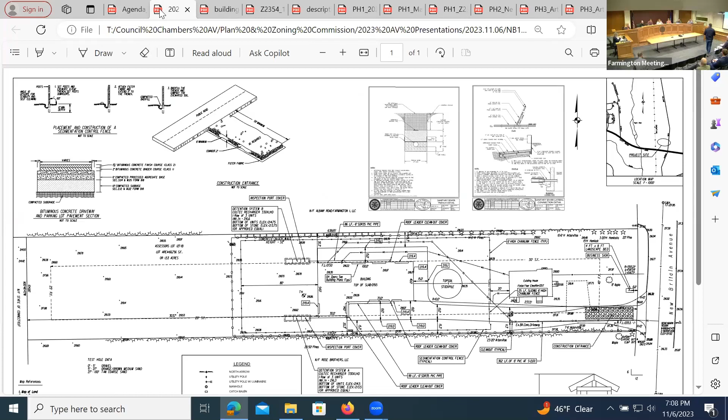All right, the first new business item in front of us is an application from B&R Corporation. It's for property located at 1722 New Britain Avenue, and it's an application for a site plan to install a steel storage building. And who do we have? We have the applicant and his engineer. Okay, thank you. If you can come up, introduce yourself and give us your address, please.

Hi there, my name is Jared Braddock. I'm here on behalf of the applicant, B&R Corporation, from 216 Bogue Road in Harwinton, Connecticut. Do you need my personal address as well?

I'm here tonight to talk about 1722 New Britain Avenue in Farmington. The plan's up on the screen. Currently it's a 1.53 acre lot with an existing 1,200 square foot plus or minus building, used as office space under previous approvals. The lot is located in a C1 zone with approximately 105 feet of frontage on New Britain Avenue, so it's an existing lot but nonconforming to C1 frontage requirements.

The existing building is serviced by public water. Upon purchasing the building in the spring of this year, we discovered the septic system required repair. We got a permit from the town and instead made a connection to the sewer lateral on the property, so the existing building is now connected to the sewer. The health department has been notified and is aware, so that work is complete. There are no wetlands on the property and none of the work is done in the wetlands or upland review area.

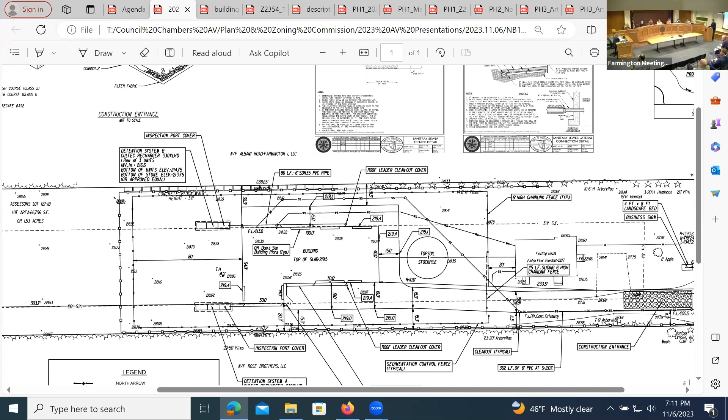The additional space on the side for the side yard would really help with the use of the building, and that 40 feet of width is important for us to fit what we want inside the building.

We received some notes last week from Shannon and her department. After reviewing them, we didn't find anything objectionable—everything the town suggested was reasonable and things that should be added to the plan. We appreciate the helpful suggestions. We submitted a revised plan this afternoon, which addresses many of the items Shannon's team pointed out. Anything not yet on the plan is simply because we're a bit short on time, not because we're disputing it—we just need a little additional time to add those items.

In brief, there were a couple things that came up, and we can go into further detail. One item was what we're doing for parking for the office space.

There is an existing house in the front. As you can see, where you pull into the driveway, there is an existing turnaround that we're proposing to use as the parking area for the person working in the office. It already exists as non-permeable space.

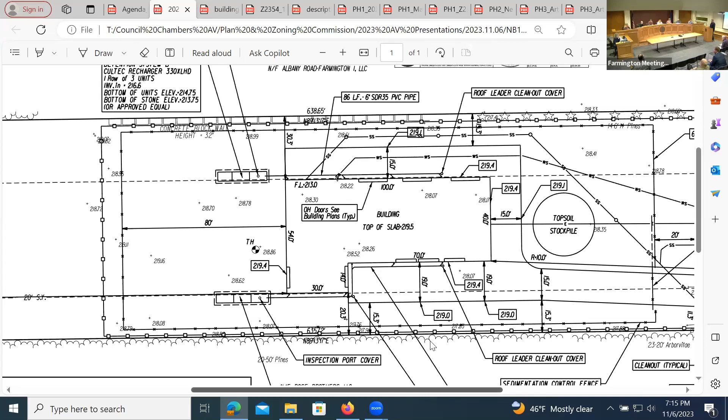There were also a couple questions as to what we submitted for the landscaping. The current plan tries to show everything currently growing on both our property and the neighbor's property. We did plant some additional pine trees on the northern side towards the front, shown as little stars on the plan. On the southern side we planted a hedge of arborvitae trees as well.

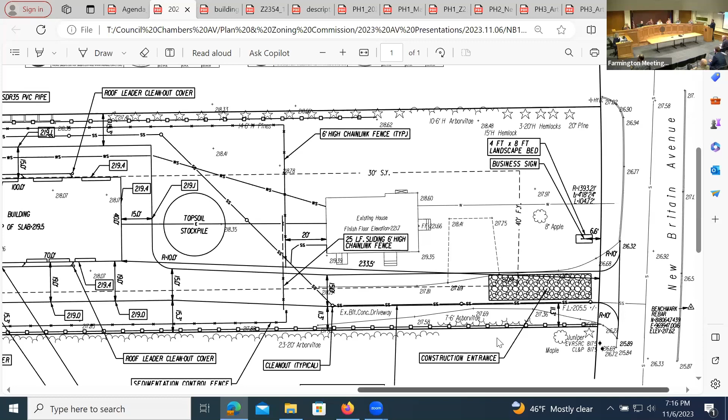When I originally read the zoning I misunderstood it required 2 trees per 50 feet. I did the math and we planted enough trees to make the 2 trees per 50 feet, but they aren't spaced at 50 foot intervals, they're all kind of together. So every 50 feet, if we need to add 2 additional trees, we'll do that to make sure we're in compliance with the zoning. That's something that was brought up and a change we can make.

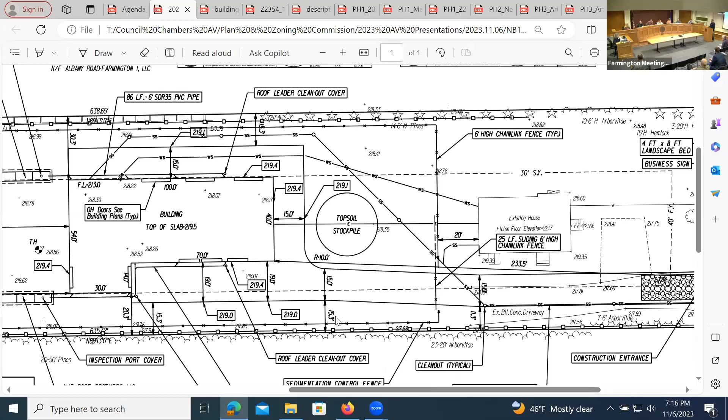That's sort of the overview. I'll take any questions you have. Brian's here with me from Robert Green Associates. Any specific details about the subsurface drainage for the roof collection, and what we've done to improve things, we have less non-permeable surface than what's already existing on the lot, he can talk to that as well.

Ideally what we're asking for tonight would be a conditional approval, if there's enough information here for you to do that, contingent on us providing the additional drawings requested by engineering and by the town, so they feel comfortable, and you feel comfortable, that we're building to zoning compliance. I think that's everything.

Brian, did you have anything you want to say before I... unless they've got comments. Okay, so if there's any questions we'll start there and go from there. Thank you. Thanks for coming in.

Shannon, can you put this on GIS for us? Of course. Yeah, you'll have to give me a minute, I didn't get a chance to open it for the meeting.

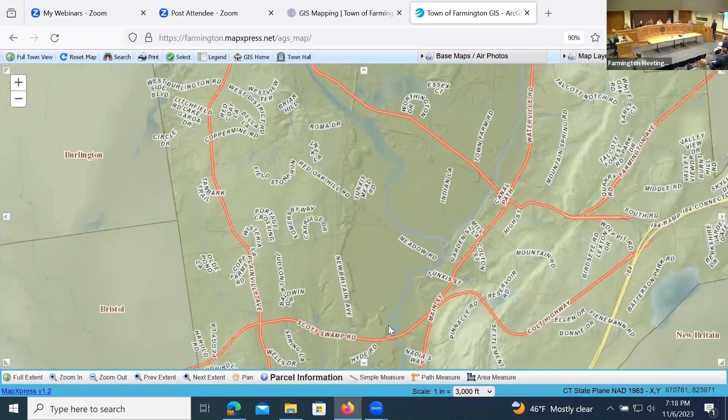All right, so it's a resident, a single family home in the front, and then this proposed pre-engineered building would go in the back. I think you told us, Shannon, that the use of office was already granted. Correct, so it has the appearance of a single family home, but it's been used in a somewhat hybrid manner over the last few years, as an office/residence. It is in the C1 zone.

So this is the property, 1722 New Britain Avenue. I'll put the aerial on. Thank you.

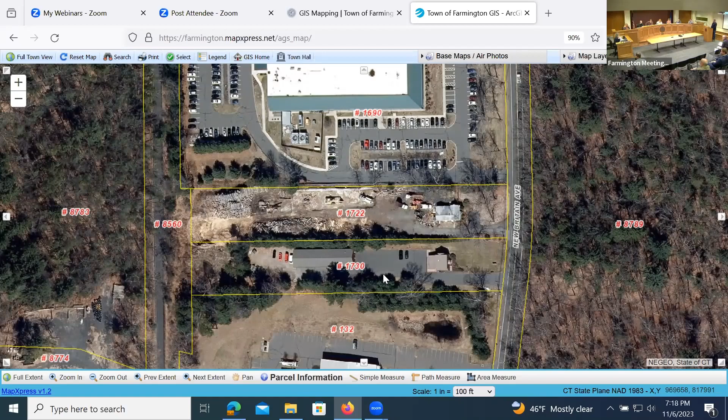And the aerial dates to 2019. So it's right next to that office park. Correct, it's immediately south. And then this, although relatively a single family home, the property to the south, 1730, is a contractor. I believe Rose Brothers is there. And then McPhee, yep, on the corner. Phoenix.

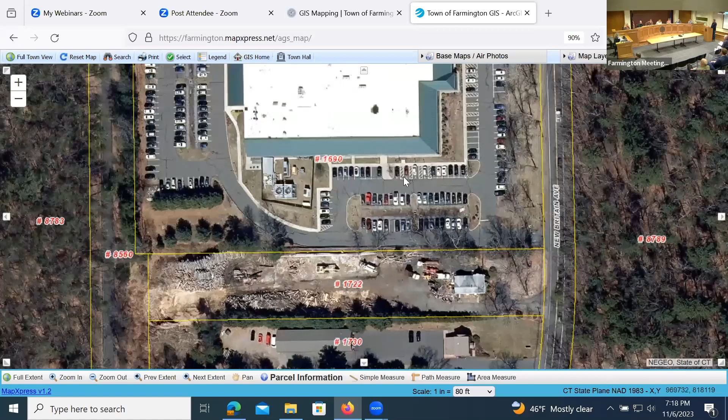Alright, let's turn it over to the commissioners. Mike, questions? How many vehicles will be stored in the prefab building?

Approximately 14 to 20 vehicles. How many of those are personal vehicles? All of them, they're all personal. So no business vehicles are gonna be parked there, they're privately owned vehicles. In addition to that, he does have a John Deere tractor that will be parked there.

He owns it, needs a place to park it. He also has a residence in Farmington, so it's inappropriate to park at the house. He also has a couple implements that will also be inside for that tractor, like a brush hog and some things like that.

You can come back, Mike. Okay, sounds good. Patrick, just to touch on what he said, you had mentioned equipment, I'm assuming that's what you mean, right? When you said cars and equipment stored inside. Yeah, so just in the interest of full disclosure, he has a John Deere tractor that he's gonna store inside there, yes, and the brush hog. Yeah, correct, and the implements for it. Yeah, that's it.

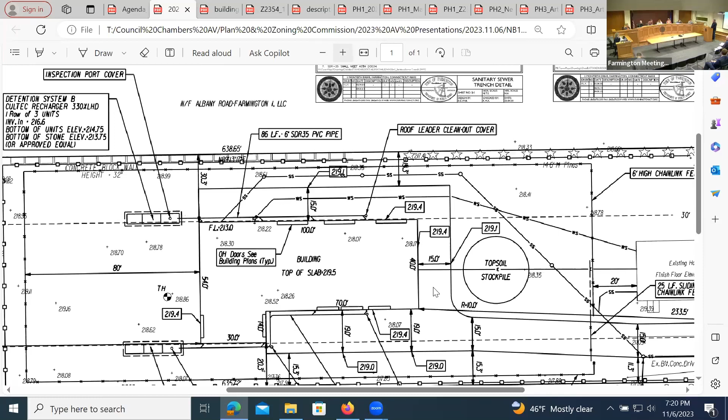Okay, Liz? You talked about having door access on both sides. Does that mean there's gonna be pavement encircling this, or what's the driveway? I'm not quite sure from the plan.

So we're showing a proposed driveway on 3 sides of the building. There is one additional garage door on the south side, back of the building, where that little L section is. We're not proposing to have any non-permeable surface there. That'd be a place where we need to mow the backyard, we could drive the mower out and have a place to park it afterwards. So the vehicles are gonna be parked along the south side, the garage doors on the south side and north side of the building.

And then there is a corner in the back there, would I guess would be the northwest corner. In that area of the building, we're gonna have a handicap accessible bathroom for the owner and a mechanical room for the heating system. And then we're gonna have a little kitchenette there where they can have a refrigerator and the sink to keep some lunch and things like that in. So like a break room, I'd call it.

I think I'm good for now. Okay, something else might come up, thank you. No problem. Matthew?

So you mentioned, or better yet, the plans show a topsoil stockpile. Is that gonna be the only location, or are you going to have more locations for the mulch and topsoil?

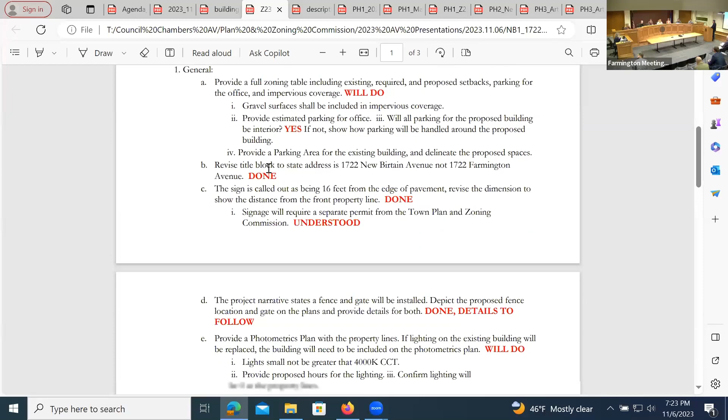So the comments include all of staff comments, engineering and planning. The responses just came back in, like I said, around 4:30-ish today. I have not had an opportunity to read through all of them.

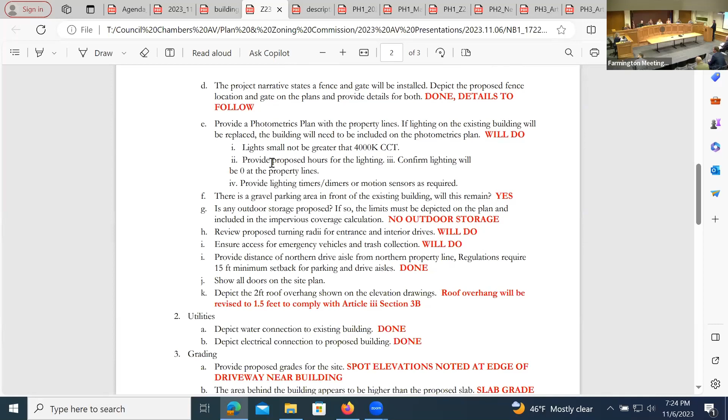Perhaps some of the more critical ones that we would have had would have been related to the drainage. Perhaps Brian can speak to those if you want. We can get to that. That's fine, okay, I'll move aside.

Good evening, Commissioners. My name is Brian Cunningham. I'm here tonight representing Robert Green Associates, engineers and surveyors out of Terryville, Connecticut.

Regarding the drainage related comments that had come in, there were some questioning the capacity of the underground storage system. I did a quick review of that and found that the initial calculation didn't account for the edge of the roof over the side of the building.

So it added an extra - in the original proposal it was 2 feet, but because that would make a zoning problem, I spoke to Jared this afternoon and said you can have 1.5 feet overhang and still be in compliance with zoning for the side yard setbacks on the building.

So in doing that, I reassessed the size of the underground systems. The system on the north side of the building had to be expanded from a 2-chamber system - these are underground plastic chambers - to a 3-chamber system. The size of the system on the south side of the building was unchanged. It was a little bit over-designed the way I was rounding numbers and all that.

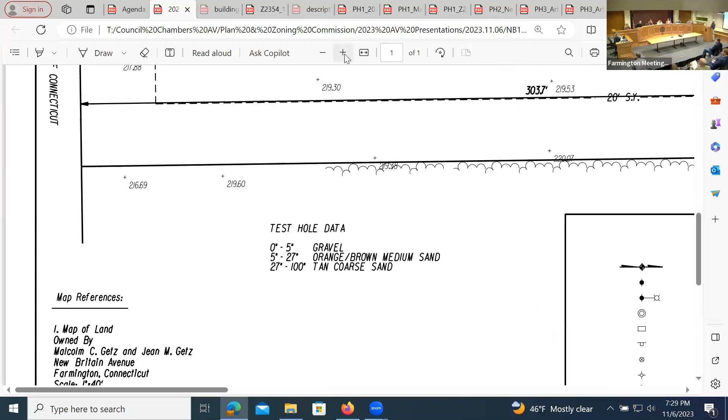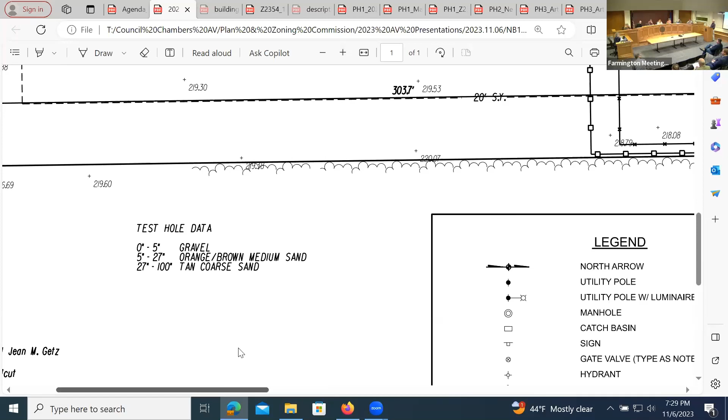We went down 100 inches. Okay, and that was done mid-October? Yes. No groundwater? No, no signs of any groundwater in the past. Mottling? There's nothing. It's all good.

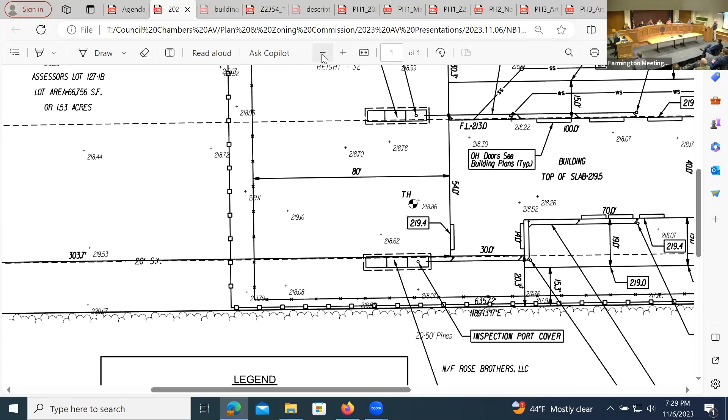You're all set, Shannon? I am with that. I've got one other related to landscaping, but I'm all set with the stormwater. I'm just thinking, do we need time to review the responses? If they just came in this afternoon, maybe we wait and vote on this on December 11th. I don't know how the commissioner feels. Well, it's the commission's choice. So, staff...

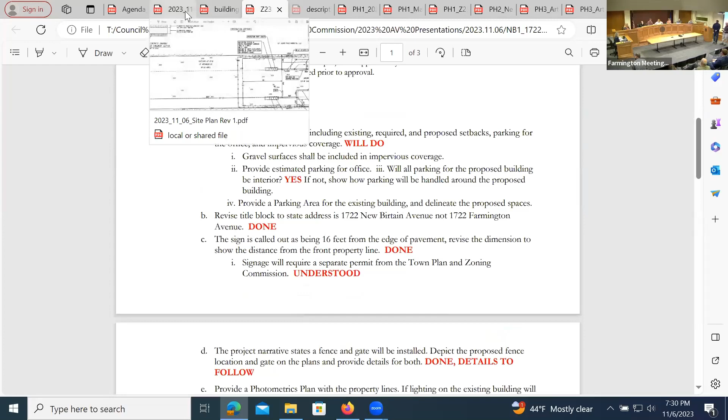Mr. Burdock, you indicated that you're agreeable to all the comments. Yeah, absolutely. Do you need to come back up? Yes, please, since it's being recorded. Thank you. There was nothing on there that was unreasonable in any way. The only thing I think I really need a point of clarification on, so we're on the same page, is exactly what you guys would like us to provide for the landscaping, which we'll do, so we're in compliance for that. But otherwise, there was nothing on there that caught my eye as unreasonable.

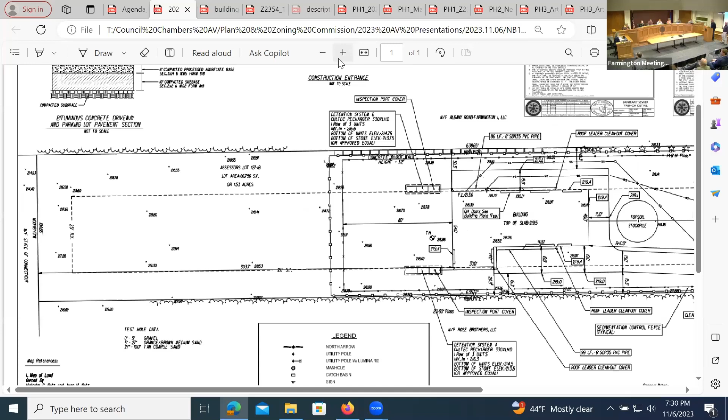It would be a 15-foot width, but really the 15-foot width is limited to where the two driveways are. So it could be the 20-foot width for the landscaping in this area, but again, it's one tree per every 50 feet. Right, the rest would be lawn.

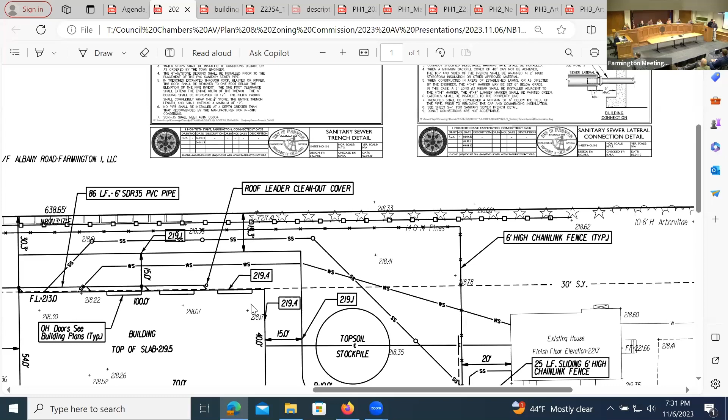The 15-foot width, I can't read this, Brian. What's the... is it 15.3? I can't read it, there's a number on top of a number, and letters. Yeah, okay, it's 15.3 feet from the north property line to the pavement, and 15.3 on the south. Correct.

And then this area to the west, grass - this is all gonna be revegetated and lawn. That's correct.

If they're agreeable to address the comments as presented, and the commission is satisfied with having them as a condition of approval, then I don't see any need for anything further. Obviously, if any of you have further questions. Mike, would you feel comfortable with those conditions?

Yeah, I do have some questions. Go ahead. Maybe just help explain this to me. So it's personal vehicle storage for up to 20 vehicles. Correct, the house is going to be office space with one full-time employee, correct. Why is there a break room in the prefab building?

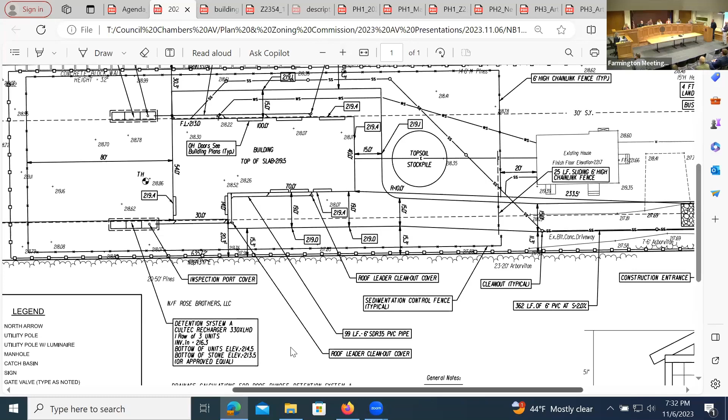Who's the break room for? The owner. I don't know what else to call it, there's gonna be a kitchenette in there, so, you know, the building's 100 feet long. He's in there with his cars or doing whatever he's using the building for. If he wants to have a sandwich or whatever, he's got a fridge to keep it in, a place to wash his hands, and that's really all it's gonna be.

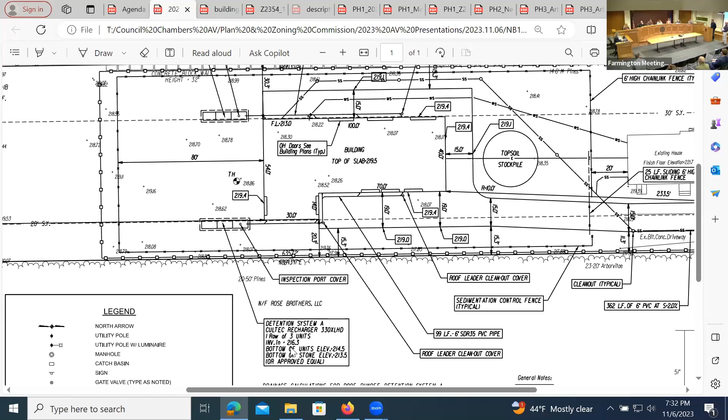And a bathroom. So is there going to be work being done on the vehicles in here? No, not outside, maybe adding air to the tires or something like that, but any work that needs to be done, people get hired for that and the vehicles go out and get serviced. Okay, I have no problem with this type of building in this area certainly, but I just wanted some clarification on what the use was. Yeah, and we're not gonna do any service to vehicles there. Only storage? Okay, you're good?

Yeah, I'm good. Are you comfortable if we condition it with engineering comments? Yeah, okay. How about this side? Any questions for the applicant? No, nothing further. What about impervious surfaces? Sounds like we're ready to vote, and everyone knows what we're voting on.

We need a motion and a second, please. I failed the first one. Yeah, you got the next one. I got the next one down. All right, so what's the condition? Condition, engineering, yeah, just to satisfy the engineering comments.

I'd like to make a motion to approve the application by B&R Corporation for site plan approval for 1722 New Britain Avenue to install a steel storage building, as presented, with engineering conditions. Shannon? Yes, fine. He's already consented to the engineering comment. All right, second. Second. All in favor? Aye. Opposed? Okay, it's unanimous, thank you. Thank you, appreciate your time.

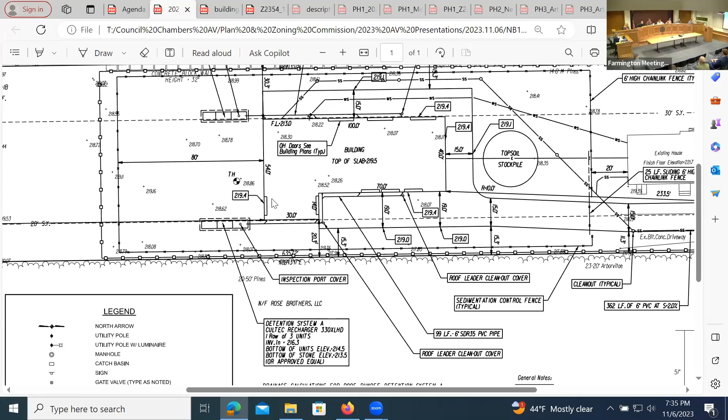Thank you. All right, everyone, we're moving on to the public hearing portion of our meeting. This is where the applicants have a chance to present their application. We, as commissioners, get to ask questions and then turn it over to you, both here and online. And we'll see how it all shakes out.

The first application is from Dunning Industries, Inc. It's an application for special permit and site plan approval for a nursery and garden center at 1079, 1085, 1091 Farmington Avenue, BR, R30, and FP zones. And who do we have? We have the applicant and their engineer. Multiple versions of the applicant.

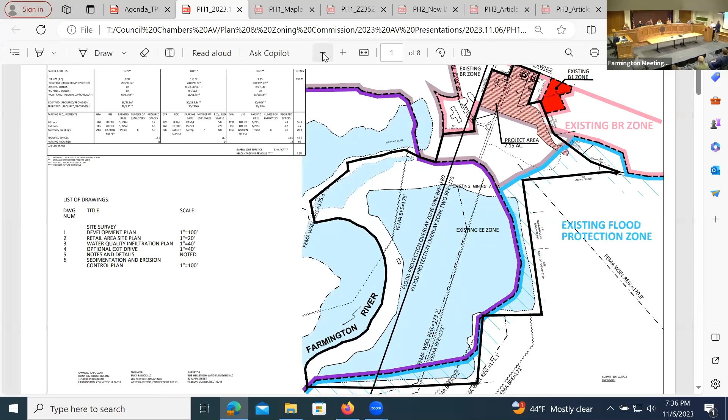Good evening, I'm Benjamin Dunning, President of Dunning Industries. This is Neil Lajeunesse, VP. Unfortunately, Bill, our engineer, was unable to be with us this evening, so we'll try to hopefully answer all the questions that you have. The application, what we're proposing to do is a retail nursery and garden center.

That's going to be catering to both retail and contractors. There are essentially three separate properties. We're going to join the three properties together into one entity, with different uses for each of the buildings. The 1079 Farmington Avenue will eventually, we believe, become a cafe for people, but that'll be a separate application.

Just speaking for the overall use of the plan, the middle building, 1085 Farmington Avenue's, primary use is going to be the retail garden center. And then 1091 Farmington Avenue is going to be our contractor offices for the contractors and wholesale nursery.

We are- I don't know if you want to pull up a little closer in on the plan. Into which part, the retail area or whatnot? 1085? Yes, 1085. Now for orientation, this was Green Tails Market, correct? Okay, thank you.

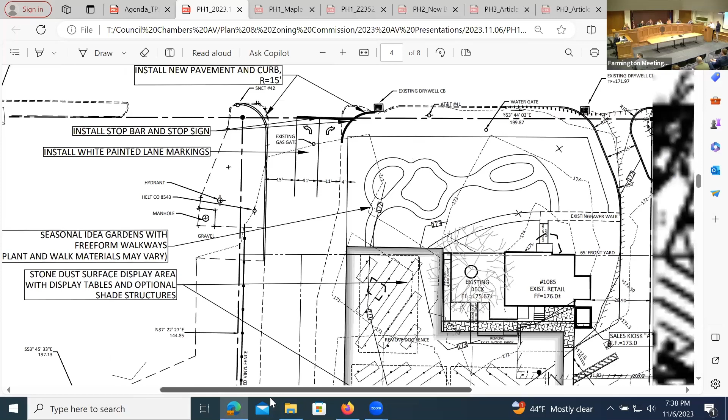So as you can see, we're proposing one entrance between the two buildings. Right now it's in and out between the two. We're proposing that to be one entrance going in with angular parking, and then exiting out between 1085 and 1097, so that the traffic flow goes in one direction. There will be contractors that come in on that same exit area, and deliveries coming in there too, but all the retail traffic will come between the two buildings.

There's going to be two primary areas for plant sales - well, actually three, but two primary ones - one directly behind the building of 1079 and the other one on the other side of the parking, to the south. That's all going to be basically a stone dust area with tables set up and irrigation for displaying and showing the plants.

There's going to be several kiosks or small outbuildings so we can ring customers up inside the building, but also have two essentially sheds with little registers in them so we can make it easier for people to bring their wagons over and ring out right there and then go straight to their cars. Inside the retail building will be smaller, pretty things, general garden accessories.

From there, we're going to have the contractor building, which will be at 1091, as an area for consulting and office space for employees. There'll be a break room over there, and then an area for loading contractor vehicles such as trucks with trailers, taking larger plant stock or trees that need to be loaded and sent out. As far as the initial use for 1079, it will be for storage and office use for now.

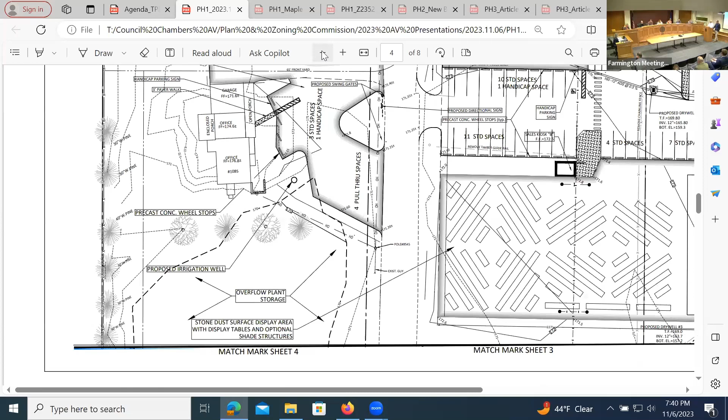We were given some comments from planning and zoning, one of which was to address adding some signage about the one-way going in to make it clear that that's only an access, and we're happy to oblige - that's not an issue for us - and clearly delineating that everybody needs to go out between 1085 and 1097. We proposed a hoop house structure, which is a seasonal structure only to be used during the growing season to house greenhouse plants.

Any of the fertilizers or things of that nature will be kept on 1091's property, which is outside the 100-year flood zone, per regulations, and will be kept locked and separated away from other products.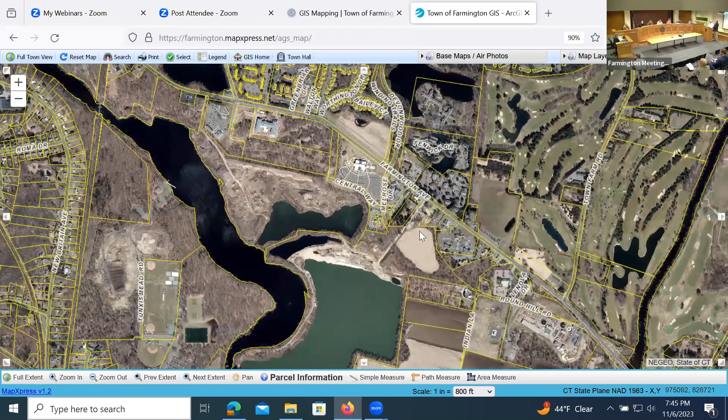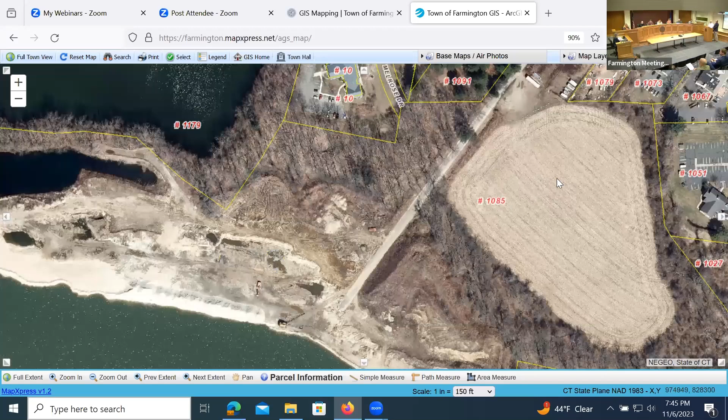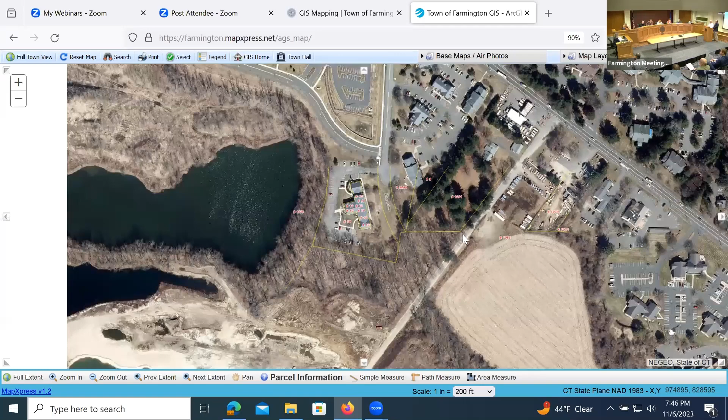Shannon, can you pull up on GIS where this comes out on Melrose? Absolutely. Here is 1079, 1085 comes all the way down to the excavation ponds and then to the river. 1091, and then there's a spur. Melrose currently ends in a cul-de-sac. There's a right-of-way extension that is contiguous to the 1085 property. Is that helpful, or do you need more? No, I don't really have any other questions. Thanks, Mike.

Patrick, none at this moment. Liz, this could have been my inability to read the mapping, but are you going to have bulk mulch and topsoil in those? No, that's only at our facility on Brickyard. This is strictly plants and other retail things pertaining to just the nursery garden center.

Okay, actually one of the other comments was what we're going to be doing with dead plants and stock that's coming out. Anything that cannot be contained down there will be brought back to Dunning Industries at 105 Brickyard Road, and we will take care of the composting and all that there.

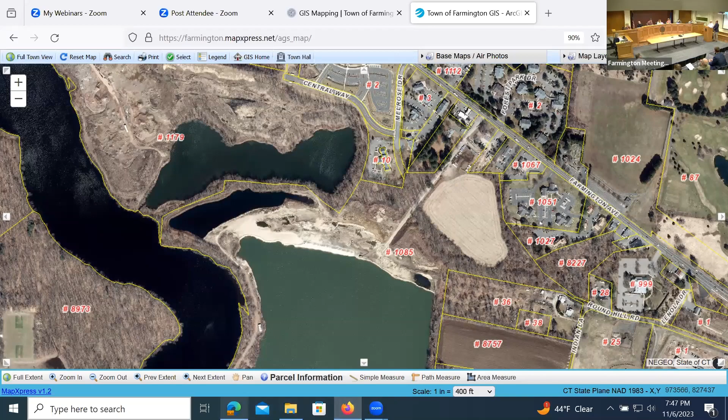And when you were discussing the stone dust area, that was your unloading pad? Correct, correct. There are just a couple of bins depicted there, and that's for the temporary storage of dead plant material. The bin fills up and then we bring a truck down, load it up and haul it, because we're permitted for recycling on Brickyard, so we bring it there to recycle. Okay, that makes sense. Thanks, Liz.

Mr. Dunning, that's these bins here, that's the intent of these bins? Yes, those bins are for either bedding material for the plants. Sometimes we have to put mulch and whatnot around the trees for bedding them in. And then any waste products go back out. If that's all that's for, thank you. All for internal use.

Okay, Matthew, what are the hours of operation? So the contractor is planned to be 7 to 3, Monday through Friday. The retail part is gonna be 9 to 5. I think it was in our notes too - 7 to 4 during summer months for the same hours. Oh okay, all right, and then 9 to 5.

Well, we had it down Monday through Sunday for the retail side, but it's only seasonal. Okay, yeah, that's all I have.

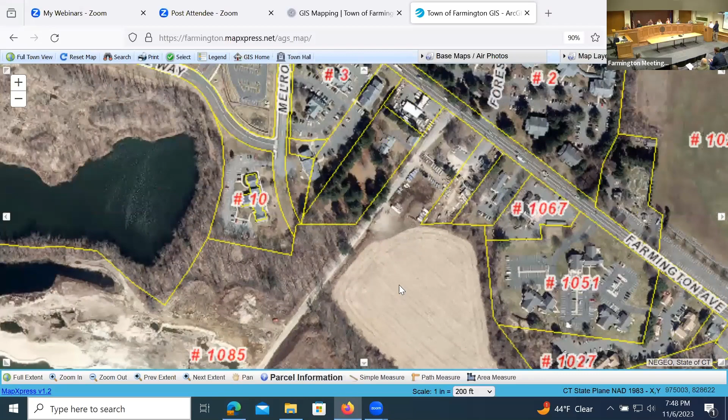James: That's kind of along the same lines as Mike's question, with the Melrose Drive optional exit, or do you guys have initial plans to eventually connect? The idea was initially to go with it, but when we went to do the permit, we decided to stick just in the BR zones for now, being that it goes down into the R30 zone. So we were trying not to complicate things by compiling two zones' permits when we were just going for the initial permit for the nursery side of things.

Right, because I think we need a special permit for a zone change, or at the very least a special permit for nursery use for that area. So you have agricultural use - I think it's going southeast on Route 4, on Farmington Avenue. You have the entrance kind of after the exit, right, if you're traveling southeast? Correct - the exit is first, on the right-hand side, and then the entrance. That's all I had, thanks.

Okay, all right, is there anything changing on the Brickyard facility? No. Okay, so we currently have some of the nursery there and that's what we're trying to move down here, so there will no longer be a nursery part at Brickyard Road. Right, okay, so it's all moving here? Yes. Okay, I was looking at the numbers, or the deliveries.

The way I'm looking at it, and I have been at the property - the dog store, right? I apologize, Green Tails. It seems to me that the traffic is increasing dramatically. I think you mentioned like 30 to 50 a day. I'm just wondering how you're determining that - kind of like going by our delivery schedule, our volume of sales now, and what we're anticipating for growth.

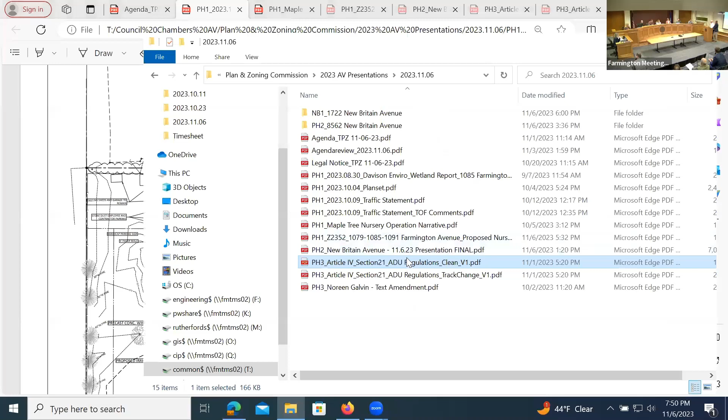But not - I mean the traffic study, actually we had gotten a traffic statement. It was considerably higher, which I didn't - it'd be great if we hit those numbers, but I didn't think that they were feasible. But at the same time, even with his statement, it said that they wouldn't have a big impact based on his numbers, and I thought those numbers were way higher than I thought we were gonna hit.

We all travel on Route 4, right? Right, yeah, okay - it's pretty much impossible, I know it's not a technical term, but taking a left out of this place. Right, okay? Well, that's why we like the Melrose idea. Yeah, I think that has to be the exit, yeah, for safety - we prefer it too. Okay, so that would be how you'd exit people that way?

Yep. Okay, yeah, the delivery schedule - so is this the delivery schedule you have on Brickyard and you're just gonna replicate it? Yeah, it's just being moved. I mean, the paver side is still gonna be occurring at Brickyard, but any of the plant deliveries will be going there instead.

A lot of the plant deliveries though come in either early in the morning, and it's mostly in springtime, and then it kind of tapers off - we don't have a lot coming in during summer, and definitely in the fall we don't have much at all. So I think it said like 1 to 2 a day in spring, and then 1 to 2 a week - correct.

Yeah, night before. Usually they'll come in the night before because they're coming either from the south or cross country, and there's enough space there where they can pull into that entrance and stay overnight, out of the way of traffic.

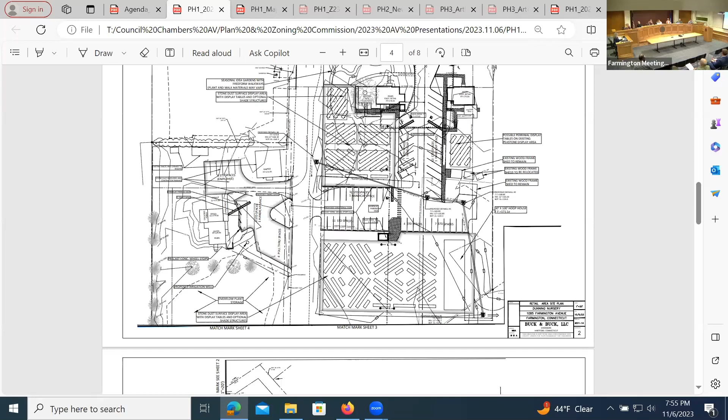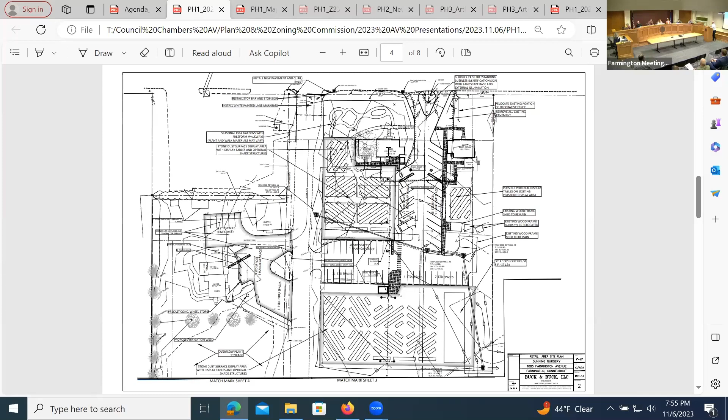Thank you. As far as lighting, the front lights, I think the lighting is pretty similar to what's already on that building. We may add a light in the back. The lighting on the front of those buildings really isn't changing at all. We will probably add something in the back just for security or whatnot, facing behind, since there's no properties back there. Depending on hours or whatnot, maybe have some lights, but any lighting we will obviously get approvals for. We don't have anything established right now for any additional lighting yet.

How about, thank you? Yeah. Questions for the applicant? What do you guys think? Are you comfortable voting on it today? I don't feel like we need to rush. It's a little bit disjointed for me, but if everyone is comfortable.

I agree with you, I think this is pretty dense, there's a lot. I think haste makes waste, to use an old one, but I think maybe if we take a little bit longer for this one, that's my feeling. I think that's fair. Okay, I agree, so keep it open till next time. I'm good with that. James, you're good with that? Mike, would you be okay with that, or no?

I don't know, what are we waiting for? I guess the town to review this, if there are any issues. So the town issued it, so if the applicant is... Has the applicant's engineer reviewed these? I don't know if they had enough time. I think we should. But we're happy to work with them. Like I said, we read through them, we have no objection.

I don't have any issue with proceeding forward. The town issued it and I just treat this like any other application. Yeah, they got it last minute, but if they're comfortable with them. What happens if we run into an issue, Shannon? It comes back?

So the subject parcel that you're looking at on your screen is shown in red. It's 9.09 acres and is currently known as 8562 New Britain Avenue. The proposed new address for the community is 1600 New Britain Avenue, as it properly sequences the addresses with the abutting properties.

The parcel is located on the west side of New Britain Avenue, just north of Route 6, in what's known as the Southwest neighborhood according to your plan of conservation and development. To the north and south, shown in green on your screen, are properties zoned C1. And to both the east and west of the subject site, there are large swaths of land owned by the state of Connecticut, almost 500 acres.

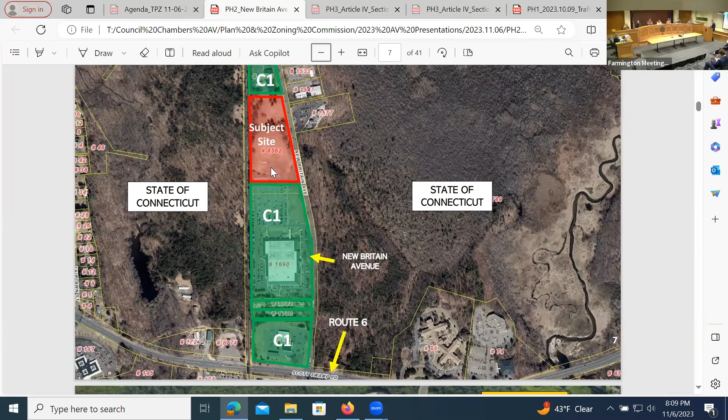So it's our professional opinion that this is an ideal site for mixed income rental housing. Aside from the broad reasons about Farmington and its desirability, the quality of life, low crime, top-notch school district, this specific parcel, shown in red on your screen, is located north of the most, or second behind the UConn Health Center district, most important employment hubs in the town.

It's our position that if we want to continue to allow these companies to grow and remain, we can't rest on our laurels. It's imperative that we provide these corporations with modern and affordable rental housing within proximity.

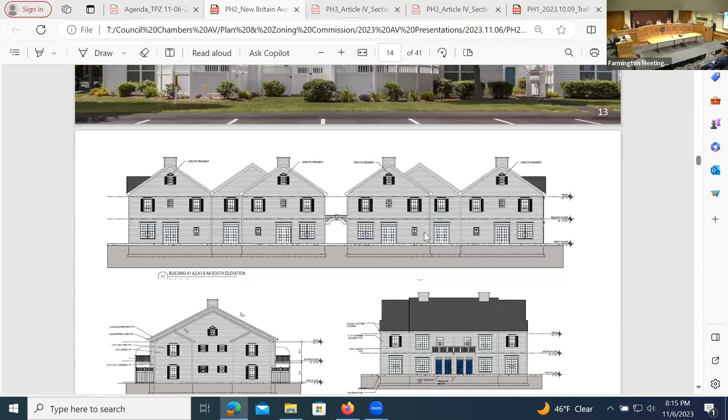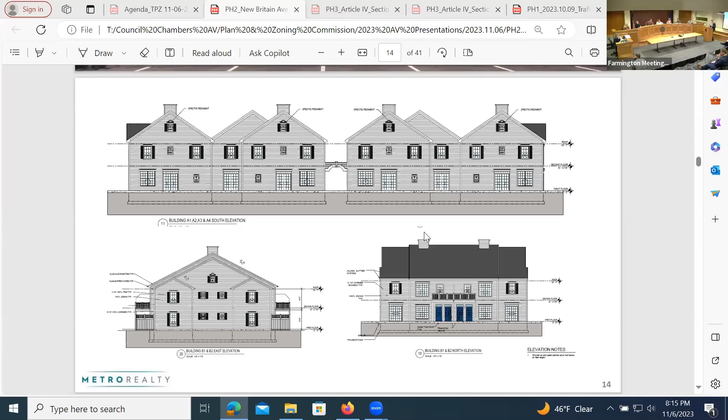So that's another shot of Heritage. Again, colonial design elements, 2 stories, direct entrances for every apartment, gabled roofs, lap siding, shutters and window pediments. Instead of white, we've elected to go with sterling gray and black shutters. The property will have a club room with TVs and working pods located on the ground floor of one of the centrally located buildings in the center courtyard.

Next slide, please, Shannon.

As it relates to sustainability and energy efficiency, this project will target compliance with the following programs: the DOE Zero Energy Ready Home Certification, which is the Department of Energy's program recognizing exceptional levels of energy savings; HERS 42, the Home Energy Rating System measuring the home's energy efficiency, targeting a score of 42; and we're also targeting LEED Gold certification.

From a conservation perspective, the project will include balanced ventilation, meaning there's an equal amount of fresh air intake coming into the apartment as is exiting. What that does is keep fresh air circulating and remove pollutants from the air as well.

High energy efficient heating, cooling, and hot water systems. Additionally, we're laser focused on the building envelope - the exterior wall construction, windows and doors detail. The whole goal is to reduce thermal gapping where the windows meet the facade, so we can produce a high level of insulative value.

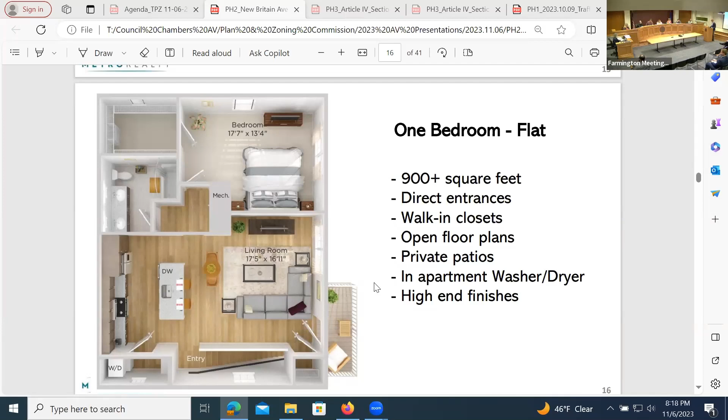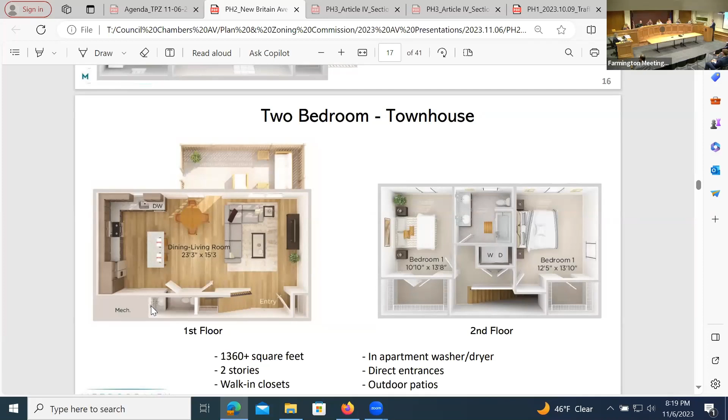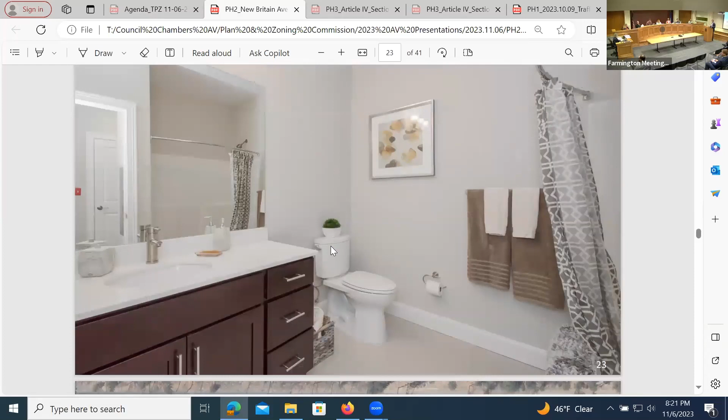This is a bedroom shot, emphasis on the walk-in closet. Washer and dryers in every unit - every 2-bedroom, every 1-bedroom has a washer and dryer. And then lastly, this is a shot of a bathroom with high-end finishes, tile floors, and quartz countertops.

At this point, I'm going to ask Tom Daly to come up. Tom's a professional engineer from SLR. He will get into more of the technical aspects of the proposal. Thank you.

And most of that grade change actually just occurs in the back corner.

The site does not have any wetlands on site, does not have any floodplain on site, and I don't believe it has any steep slopes. So from a designer's standpoint, it was really a good palette for us to design.

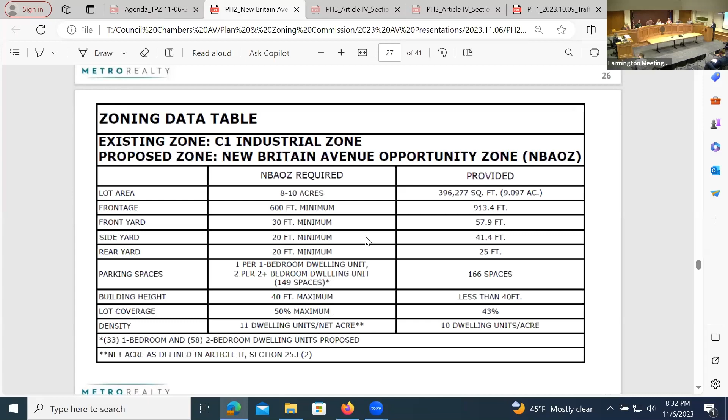Shannon, if you could go to the next slide, please. One more, actually. So I'd like to spend some time on affordability before I hand it over to Mark Vertucci for the findings from his traffic impact study.

This community, as Attorney Hollister mentioned, will qualify as assisted housing within 8-30G. What that means is it will qualify as such by either obtaining financing from CHFA and DOH, or receipt of low-income housing tax credits. As an assisted housing community, the town will receive credit for all 100%, 91 proposed apartments, towards the 10% DOH list. The level of affordability, however, depends on the financing secured.

Our preferred financing execution is through the low-income housing tax credit program. This is a federal program administered at the state level, and it's competitive. Our application is due in January, and like 80 South Road, which received an allocation in this year's round, if we are successful, our project will comprise 80% income restricted apartments and 20% market rate.

You could go to the next slide, please. So more specifically, this is an affordability matrix. 20% of the apartments will be leased to someone making at or less than 30% of area median income, 40% to those making at or less than 50% of area median income, 20% at 80% area median income, and 20% at market rate with no income restrictions.

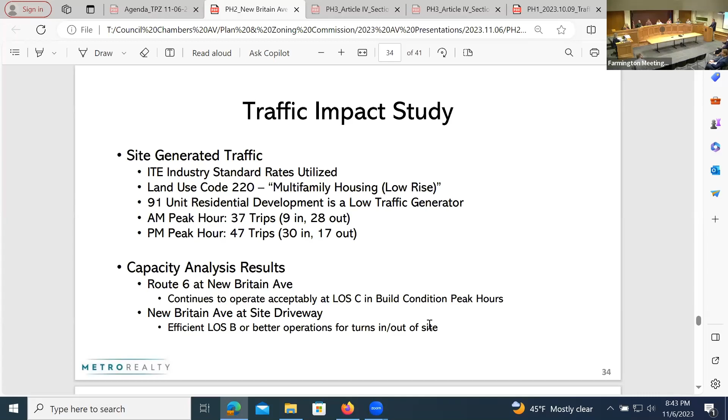What we found was at the intersection of Route 6 and New Britain Avenue, that intersection in the build condition, peak hours will continue to operate at an acceptable level of service C operation. And at the New Britain Avenue at site driveway intersection, the analysis revealed efficient level of service B or better operations for turns into and out of the site.

On the next slide, we looked also at queues. In our analysis, there were no significant increases in queue lengths — in fact, it was a negligible increase. The queues on each of the intersection approaches averaged less than 1 vehicle length. From a safety perspective, we did measure intersection sight lines from the proposed driveway location.

The sight lines looking in both directions coming out of the site exceeded DOT criteria for safe egress. And lastly, we did look at crash analysis as well. We reviewed the latest 3 years of data from the UConn crash repository, and that analysis revealed there were no abnormal crash frequencies or severities in the study area.

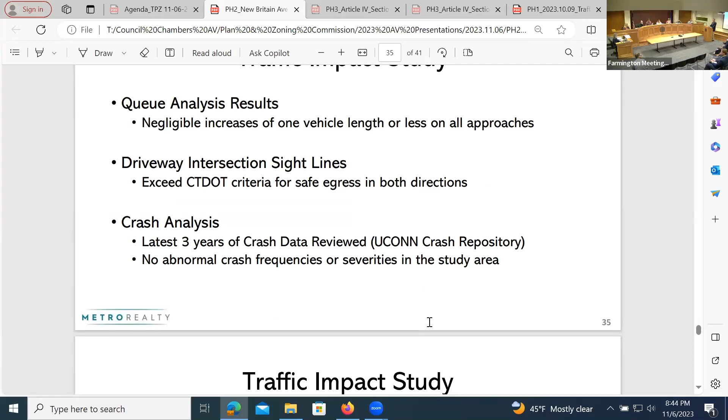So in summary, the conclusion of the traffic impact study is that the proposed residential development will not have a significant impact to traffic operations within the study area, and the development traffic can be safely accommodated on the adjacent road network. With that, I'm going to turn it back to Attorney Hollister, who has some closing remarks.

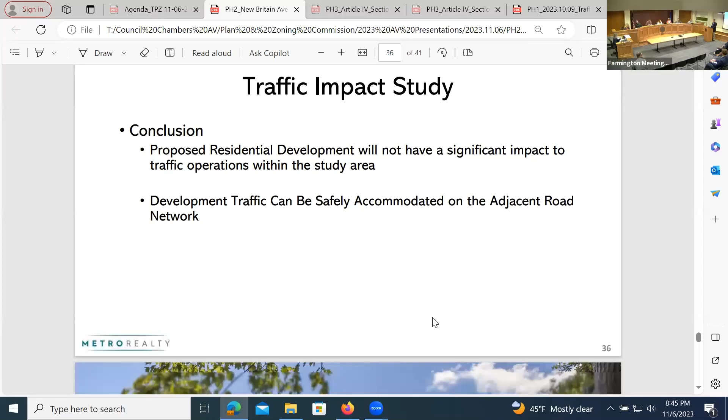Thank you. Jeff, did you? Okay. Mr. Sager has declined, so I would just say thank you. I want you to know we looked really hard to find something wrong with this site and we couldn't find it. So anyway, thank you for your patience in listening to us. I think that's what we have to present, and we're here for questions.

That's good documentation, right? That was provided prior to the meeting and today. All right, commissioners, let's turn it over to you for questions.

Mike: As always, thank you for the detailed presentation. I don't really have many questions. I know you said you were good with most of the items for consideration and conditions. How about the sidewalk installation along New Britain Avenue with the extension?

I think the comment was, to the extent we were successful in getting public transportation, the bus, extended to the site, which we will endeavor to do, we would be happy to install the sidewalk along the frontage to access that. I believe that was the comment. Shannon, correct me.

Correct. In the absence of any public transportation, which there's not, we pulled the transit. So right now there isn't any public transportation along New Britain Avenue, or for that matter, even along this portion particularly of Route 6. So unless there's a rework of the CT Transit, there does not seem to be a driving necessity to have sidewalk along the frontage.

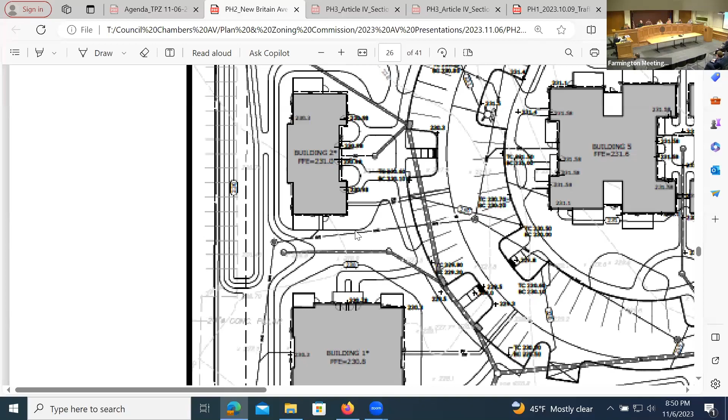Yeah, if I can step over, if it's okay. Berm, berm. How tall are those? These are 1 foot high. Okay, so in this particular location, it's 1, 2, 3, 4. So we try to fit in, so I would say they're probably 3 to 4 feet, and then we have berms on the other side too.

These look like landforms in the front, they're actually depressions. And over here, same thing, berm, but that's for stormwater, so from a planimetric view they may look the same, but they're different. The intent on the front edge was not to screen the site. We think it's an attractive site. We want to save as many trees as we can and then complement those with filling in additional trees. So you're still going to have a very open view into the site, we're not trying to hide it.

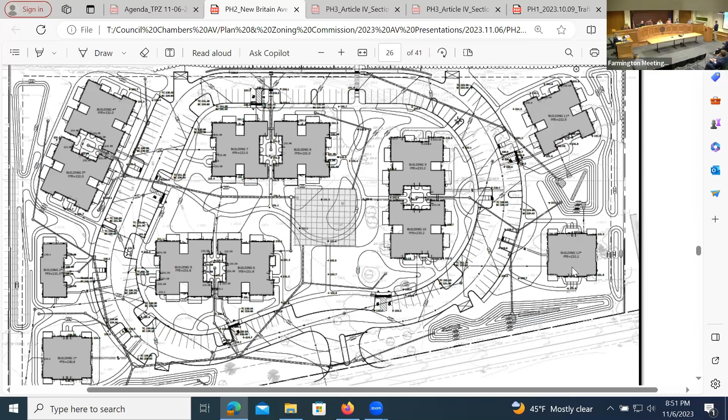With the parking lot to the south, if you look at the landscaping requirements, there's multiple ways you can do berming, fencing, and landscaping. The landscaping alone meets your standard. But then we found real estate and we were trying to balance the cut and fill, so there was an opportunity to fit some berms in there too.

And then north and south is because that's where our neighbors are. If you look at the aerial, even the property to the north, the building's not that far away off the property line. And then the parking lot here, we are removing about 20 feet of pavement, if you remember, but it was still an opportunity to build some berms there.

Okay, thank you. Yep, that's it? Yeah, that's all right. How about you, James? I don't have any additional questions. Okay, I have one more. Yeah, I'm sorry, no, just thought of it, it's all good.

Any possibility of EV chargers or hookups, what role is that gonna play? I know we all want to go electric. And that's actually a town comment, and to be honest, the EV charging thing is changing so quickly, it's really hard to keep up, and there's questions about everything. I believe the new building code requires that at a minimum the infrastructure has to be put in.

But we're working with it, and Metro, I think, uses these units where they're like a double charger, a single unit and then you can come up. But to be honest, we're really still trying to learn the thing, even like where do you put them, how do you put them, what do you do with the snow? And actually even handicap parking and how that plays in, we believe there has to be a unit that's handicap accessible.

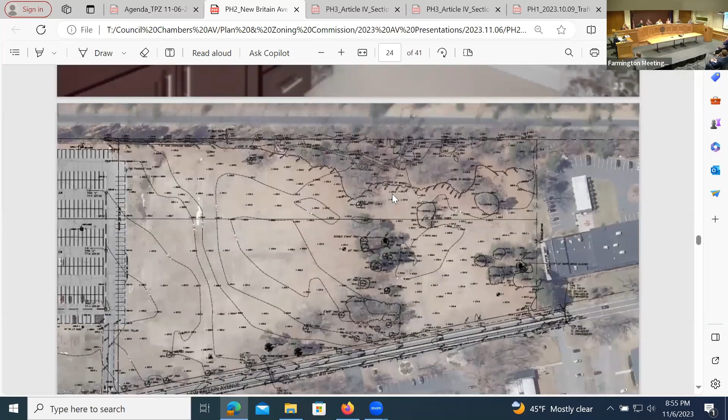There is sort of a bizarre situation. I'm still trying to get to the bottom of exactly what existed there. Maybe you know, I don't. But yes, right where the forest is, there's a small handful of trees, but in the middle there's like a concrete structure that's a little odd. Curious. Is it staying? Mystery. No, no. Okay, all right.

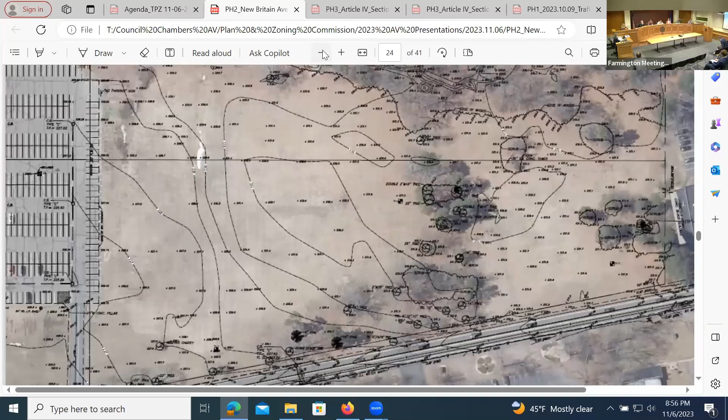The New Britain Avenue mystery. I read about it, all right. What it was one time, but I forgot. But I know, thanks, Mike. Now we're all still going to go check it out, driving by there. We'll all have to go check out the historical society. Sidewalk, yeah, no historical significance, right? All right, Commissioner Gurfulis, that's your homework assignment for December. I'll get on it.

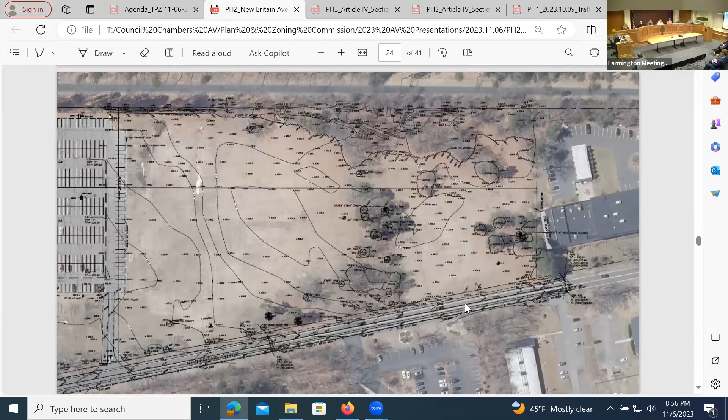Any communication, Shannon? Are we getting phone calls on this application? We did receive two letters of support, as Mr. Richards made reference to. We received the letter from FIP and from McPhee. They were in favor of the project. I think I've got them, I don't have them open right now, but they are part of the project record. We did not receive any other written correspondence. I personally did not field any other phone calls regarding this application.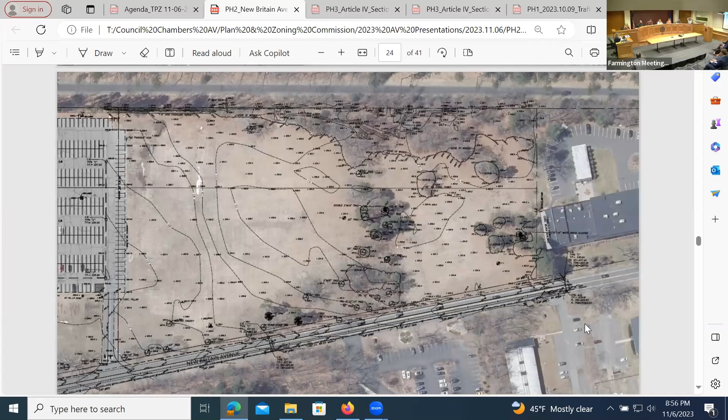Okay, thank you. All right, is there anyone in the room that wishes to speak regarding this project, or has any questions? Come on up. Come up to the podium, state your name and give us your address, please.

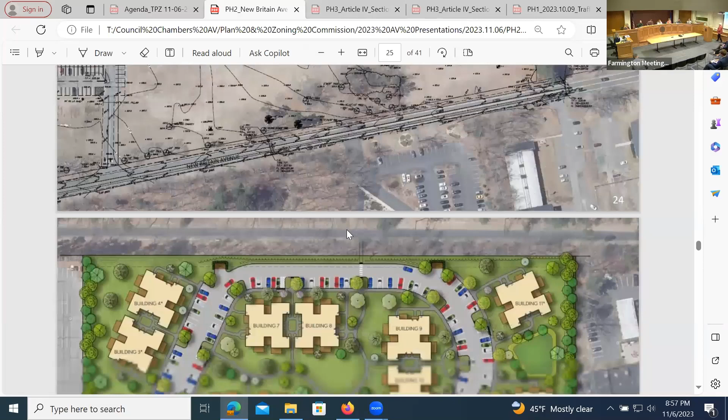That's a tough act to follow. I feel a little outnumbered here, but my name is Lynn Mahana and I live at 1169 New Britain Avenue with my husband, Lee Mahana, a native of town. My next door neighbor is also here, Deb Root. Our house is about halfway between Meadow Road and Red Oak Road. If you come down Reservation Road, you see our house right there. My husband has had that house since he was 20, 21, 22 years old, so that's about 60 years or so. He's a native of town. We married approximately 38 years ago, so I've only been around for about 45 years in town, so I'm a newbie.

I almost get the impression from hearing not a lot of questions from you, and a wonderful presentation from Metro with their attorney and engineering crew, that this is probably a pretty much done deal. But I would still like to have my say as far as how I feel about the way that the town is developing the area on New Britain Avenue. We've gone through quite a few things here over the years in regards to New Britain Avenue.

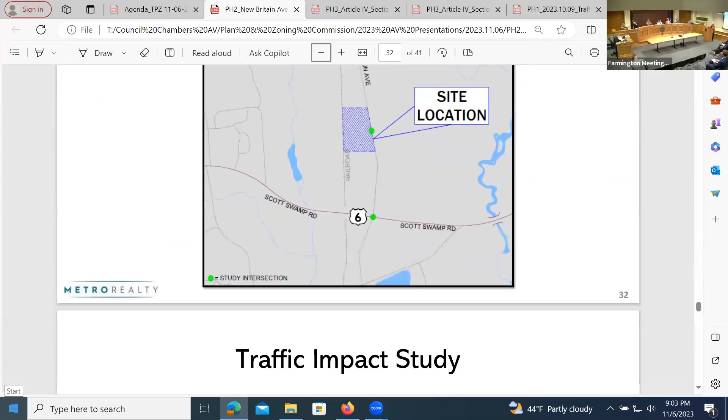28 exiting in the morning and 9 entering. That seems something's wrong with the picture here. And in the afternoon, there's only going to be 30 entering and 17 exiting. Nobody works in this complex? Nobody goes to work? I'm not quite sure how those figures worked out, but that's one of our concerns.

And the bridge that will probably come in, because you've already bought the property across from Monteith Drive, so that's in the picture here too. When my husband spoke to Jimmy Rose a couple weeks ago - Jimmy Rose is next door to the people that came in earlier for the Supreme Industries proposal - he said, 'I had no idea until you just told me, and I looked it up in the newspaper that this was happening.' So I'm not quite sure who you notified to get this message out that you were putting 91 apartments in, because even he didn't know about it. So I'm taken aback a little and surprised at how fast this came about.

And a couple other things - we were a little concerned about what was happening with all the trees in the front. And Kyle, you said that you're going to try to save some of those trees.

We, living in Connecticut, are used to the state now cutting down every tree there is on the highways and everywhere else that they can find a tree to take down.

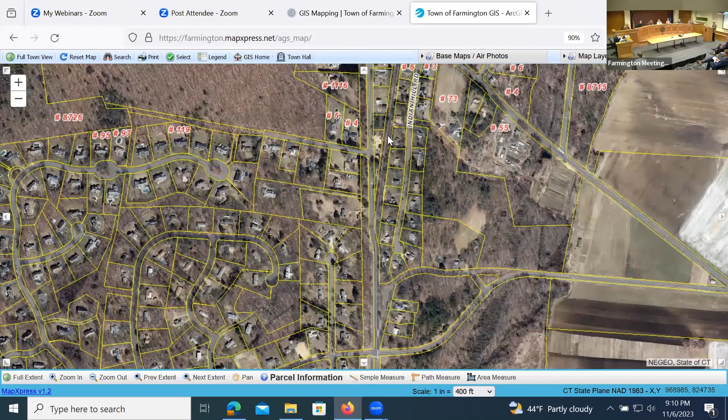That's the purpose of having these signs on the frontage of the property, so individuals traveling up and down New Britain Avenue would have an opportunity to see that sign posted. That's how Mr. Rose being abutting would have received it. That was sent by certified mail, return receipt.

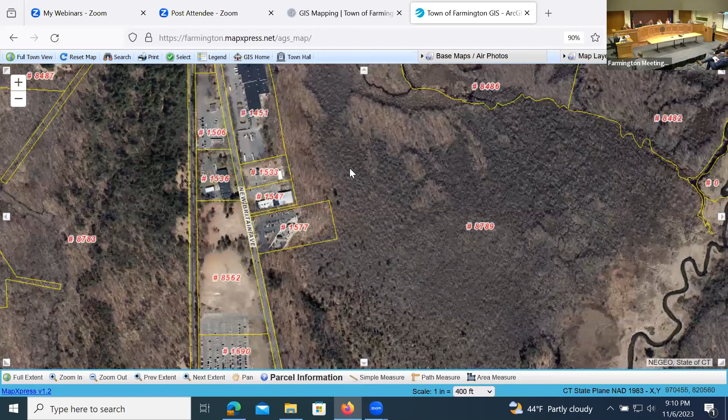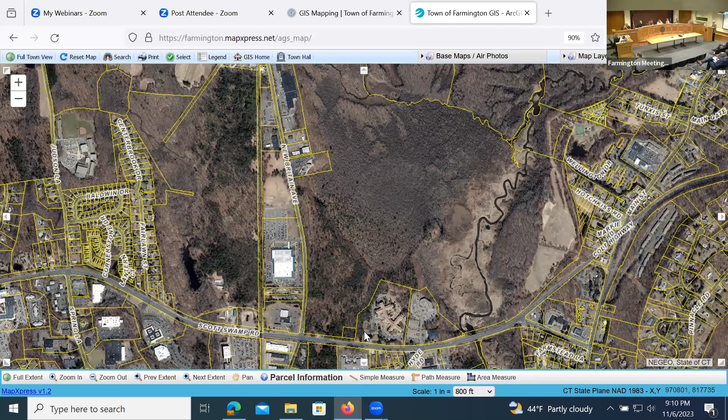Two points before we get to traffic. Mr. Richards showed you the photos of the developments over the years. Relationship to abutting uses came up in every single one of those. Metro has a track record of being a good neighbor, whether it's security cameras or buffers or making sure that their tenants follow the rules to be good neighbors. We certainly appreciate the neighbors' concerns, but with this applicant, this property, and this design, there should really be no impacts.

The other thing to consider is the property is zoned C1, so all the things that could be in the C1 zone would be the alternatives. The lady who just spoke said she'd rather see a commercial building. Well, maybe it'll be commercial. It could also be a lot of other things much more traffic intensive than what is proposed, because residential spreads the traffic out in a way that commercial, retail, and industrial does not.

Mark, do you want to talk about 1 hour versus peak hour? Yeah, good evening again, Mark Vertucci from Fuss and O'Neill. Just wanted to clarify, the trips I stated were 9 entering, 28 exiting in the morning peak hour, and 30 entering, 17 exiting in the afternoon peak hour.

The morning peak hour is 7 to 8 a.m., that one hour, and the afternoon is 4 to 5 o'clock. We chose those two hours because they're the highest generating hours of the day, not only for commuter traffic or background traffic and school traffic on the road network, but also the traffic generated from a residential development such as this.

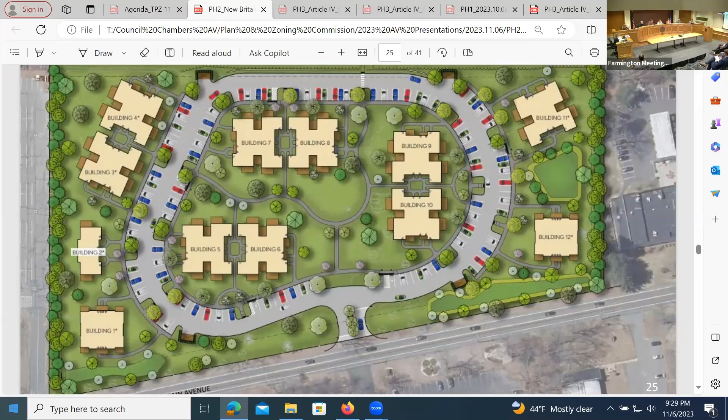Okay, thank you. Liz, what do you think of the site plan? I think it's well presented and well researched, and a fairly forward-thinking project in terms of addressing the key affordability issues, which is a huge deal, but also built-in amenities, looking to increase transit opportunities. And if a bus line could go there, that would be great. I really appreciate all the details and taking the time to do it the right way. As we said, we've been talking about affordability, and this meets the workforce housing needs that this town has. And they're awfully nice looking units.

So from my point of view, I think it meets a very big need that we have in a very good way. Thank you. How about you, Patrick? Yeah, I mean, I echo everything you guys have said. I do this for a living, so I can really see the layout, and I appreciate it. I don't think you could do a better job laying this piece out. It's gonna look great.

Mr. Grubel, are you good? Echo everybody else. Like James said, I appreciate the traffic concerns, but I can't base my decision for this project based upon a proposed third bridge. We can't do that.

Okay, well said. I thank you, commissioners, for looking at tons of information over the last month, and obviously today, your thoughtful comments. The reality is that not everyone can afford to buy a house in Farmington, and this is a wonderful community. I love it, I love the amenities, I love all the green space. I think being on the bike trail sounds annoying if you're directly on it, but I benefit from it - hopefully my dog isn't too crazy. And I don't know if it's optimistic, but if I lived here, I would not be driving through Unionville, I would be going on Route 6. So I hope that happens for the neighbors that are concerned.

Yes, and I think I'm ready to vote. Is everyone ready to vote? Okay, all right. So all in favor of the site plan for this application? Aye. All right, unanimous. So we're all set. Thank you for coming in.

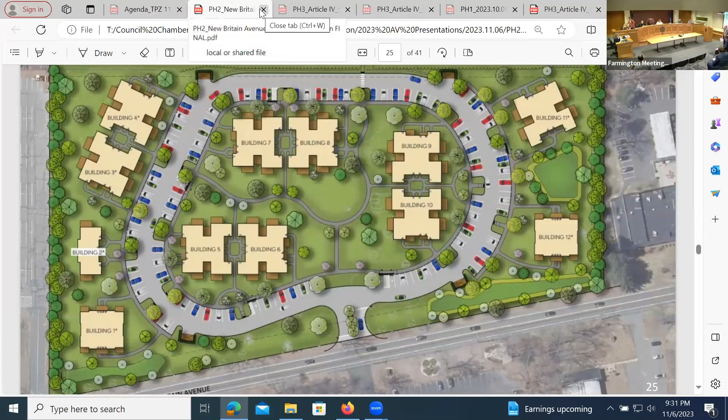Yeah, go ahead. Same here. Yeah, go ahead, take it. Yes, take a minute. Because we have one more application. Thanks.

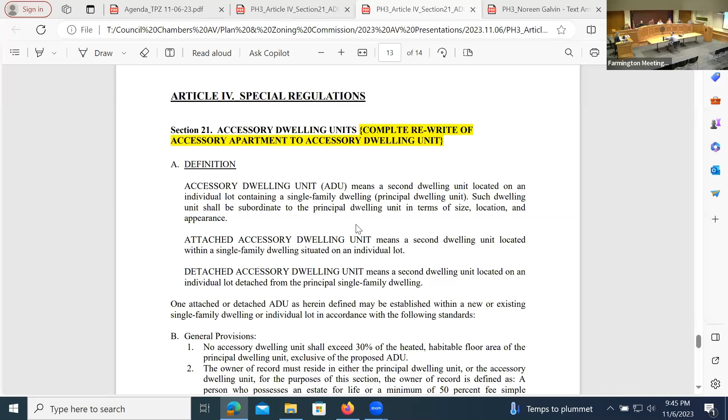So then it brings us to the complete rewrite of the accessory apartment regulation. It's now going to be referred to as our accessory dwelling unit regulation. And we came up with definitions of what is an accessory dwelling unit and what it means to be an attached accessory dwelling unit versus a detached accessory dwelling unit.

And one attached or detached as herein. Yes, so this is just the general provisions then for the ADUs of what our expectations in these standards are to follow for an ADU.

There's general provisions that talk about not exceeding 30% of the habitable floor area of the given home. We talk about the owner and who the owner is, and this is the same terminology that had been in the accessory apartment, that they have an estate for life or minimum 50% fee simple ownership, and they will occupy at least the principal or the accessory unit for 6 months of the calendar year.

And the ADU can be rented or leased, and we put a stipulation of not less than 6 months so that we don't get these on a week or month basis - we're not looking to have Airbnb. Thankfully, we don't have many, we're not a shorefront or waterfront community, so there's not really a driver for Airbnbs.

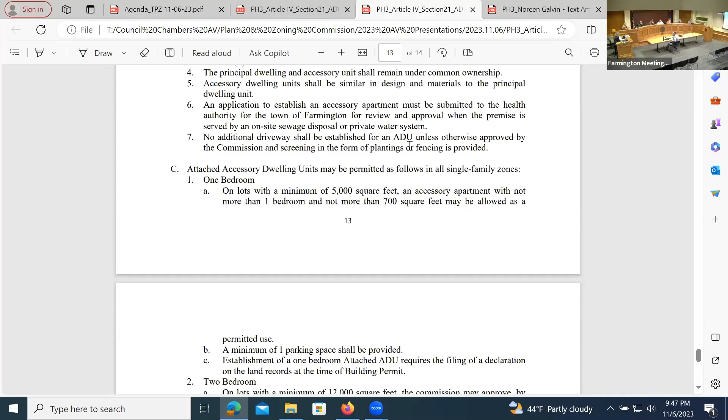Health department review, obviously, for anything that's on a septic or well, and no additional driveway unless approved by the commission. So we then go into specifics for the attached accessory dwelling unit, and we talk about minimum lot size.

This starts to get into what's permitted with the room, the building size, the apartment size itself, the dwelling unit size, the parking space requirement, and the bedroom requirement.

And then there's a separate provision for a 2-bedroom unit. The 2-bedroom then talks about a larger lot size and the public hearing requirements. So it would be necessary to have 2 parking spaces.

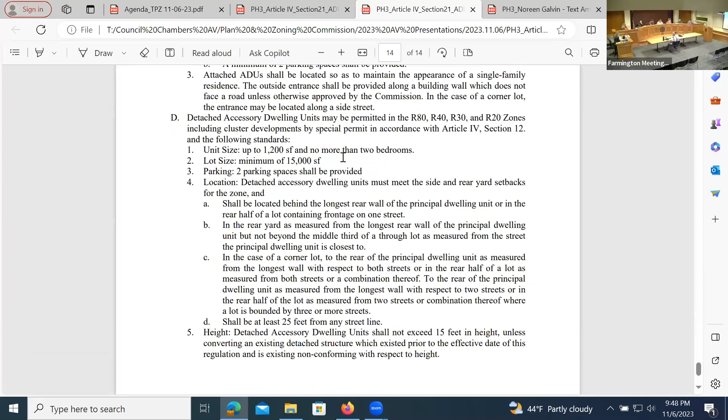Detached, we go through some of the similar parameters. We talk about the size, the maximum size. So for a detached, we up the size.

You'll notice, so this one, attached, has 700 square feet for 1 bedroom, up to 1,000 square feet for 2-bedroom. And then the detached, we bumped up to 1,200 square feet.

We set a minimum lot size of 15,000 square feet. We did that because there are some R20 lots that are not 20,000 square feet. So they're existing non-conforming, or they're in a cluster, but they're still technically zoned R20. So we put this in to try to cover both the intent.

So if we get a cluster, it's R20, but it's at 10,000 square feet, they're not meeting the minimum lot size. They're going to get kicked out - they can't apply. So they'll have to meet that minimum lot size of 15,000.

The location matches the discussion that we have for many of our other accessory amenities for a residential building, like sheds, pools, satellite dish, and solar panels - those type of things, that we want them behind the longest wall of the principal dwelling, towards the rear of the home.

In this case, we are requiring that the side and rear setbacks be held for as they would for the principal building. So we don't want them - a shed can be 5 feet off your property line, technically a detached garage can be 5 feet off your property line, but if it's going to be a dwelling unit, we want it to adhere to the setbacks of the zone.

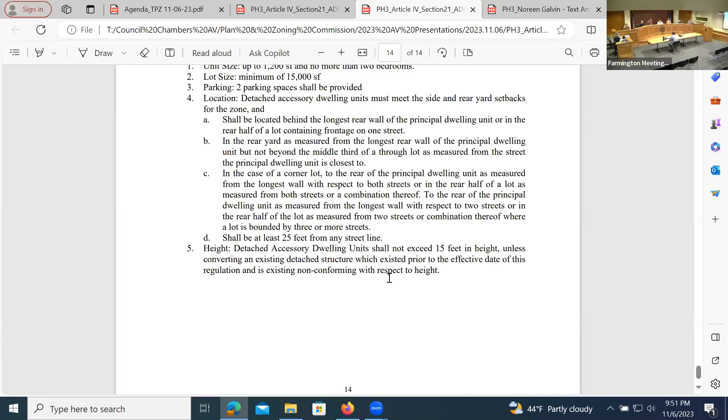This is a lot of work. Thank you, wow. A lot, yes, thank you. So it's a lot to digest.

Thank you for tracking the changes. Actually, should I even be speaking, Shannon? I don't know if you're... No, you're done, so I'm finished. What I'm realizing, looking at this, Garrett, you're gonna have to, I'm not seeing the side and rear yard measured.

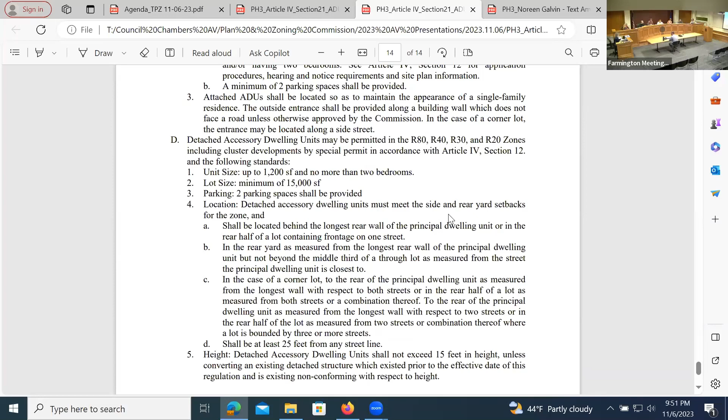Oh, here we go. Detached must meet the side and rear yard setbacks for the zone, and there we go, that was right in the lead. D4, I was looking for it in the A, B, C, D, the side and rear yard setbacks, but it's right in the main part of 4. So you must meet the side and rear yard setbacks for the zone, and it talks about the location behind the principal dwelling.

So we've only looked at it a few times along with a few other things. So, no, there's a comment for you.

Certainly if Mr. Galvin or his sister want to make comment, or if there's anybody else online, the thought would be to hear any public comment this evening, and then let this sit for 30 days, because there's such a difference in what had been presented with the application versus how this has evolved and really was only finalized last week. I want to make sure we're allowing appropriate time for review for you folks, but also for public review and comment on this as much as possible.

So it's on the website. It'll stay on the website for the 30 days, and it's been sent to CRCOG. So thank you, again, thank you for putting this together.

And any comments, suggestions, whatever, we can send to you in the meantime. Absolutely, if there's any questions this evening, I'm happy to address them, but anything in the interim, if something comes to mind or you're concerned about something, it does not have to wait till December. Get it to us, we'll compile everything and get it back out with the agenda items in December and have that posted so it's available for everyone.